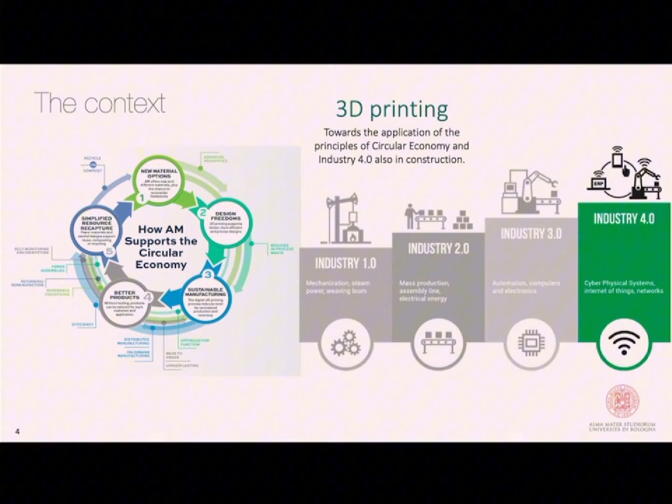But once it kicks in, you'll learn about how topology optimization and additive manufacturing can create a new generation of green steel construction, having more efficient structures, supporting circular economy, and providing more efficient structural forms.

Just to give you an overview of some applications of what I refer to as additive construction with a little bit of metal in it. When it comes to additive construction, most people just refer to unreinforced masonry units realized with concrete 3D printing. Honestly, to me it's not maybe the best way of using 3D printing to create something new that can be achieved only with 3D printing and not with conventional manufacturing technologies.

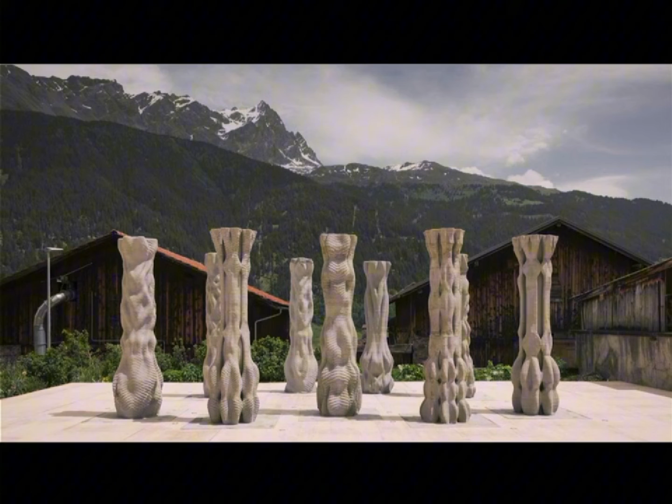So I would be more interested in something like that. This is actually what's called the dancing columns, a project from a couple of years ago from ETH Zurich. This is, to me, the sense of using 3D printing to create something new, not necessarily conventional, but out of the box - not just in form, but also in material.

This is an example of earth 3D printing done by an Italian company called WASP 3D, so that you can actually build with other materials.

And hey, you can also build with metal. This is actually the first example of large-scale metal 3D printing for construction, which I'm going to talk a little bit more about later.

Hi, Thomas from MX3D here.

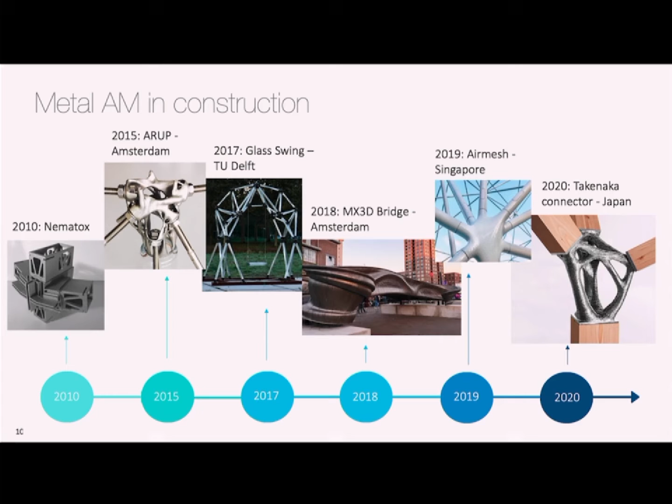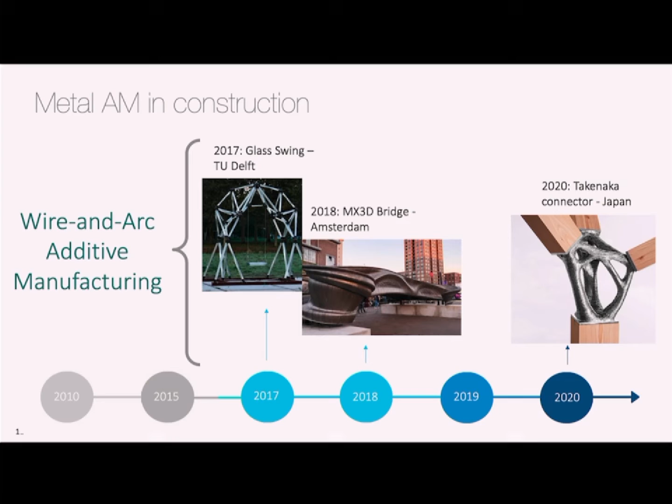Just to give you an outline of metal 3D printing in construction, the timeline is quite short. There were just a few applications almost 15 years ago, but mostly in academia, not really applied in real constructions. When it comes to the scale of elements to be printed, it increased only with the use of wire arc additive manufacturing - large-scale metal 3D printing solutions.

This is actually the very first example - it was a facade node in aluminum made by powder bed fusion, and it was just an academic application.

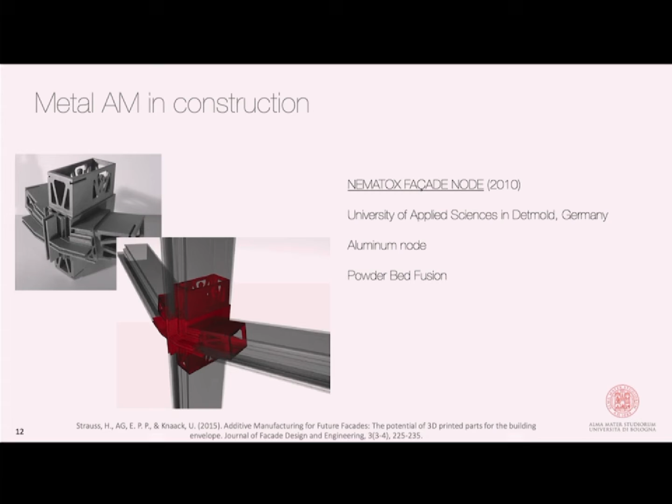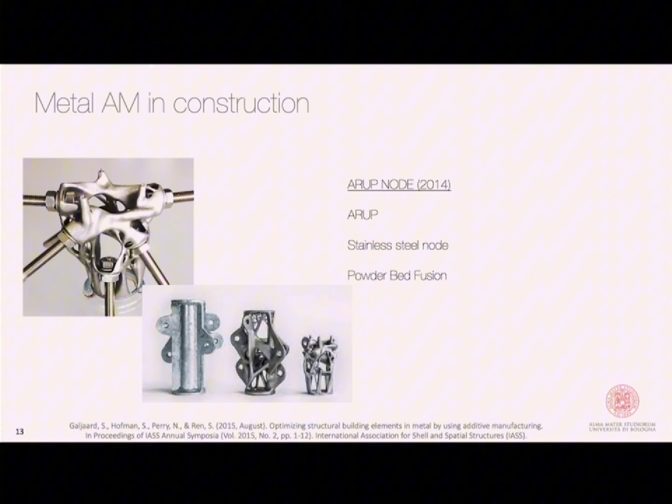The real first industrial application of metal 3D printing in construction comes with the Arup node. It was a project done by Arup, from their Amsterdam office. It was a pity that it never actually saw the light of a real application. But this one did - this was the very first application, to me, of what it means to create something in metal 3D printing for a construction application.

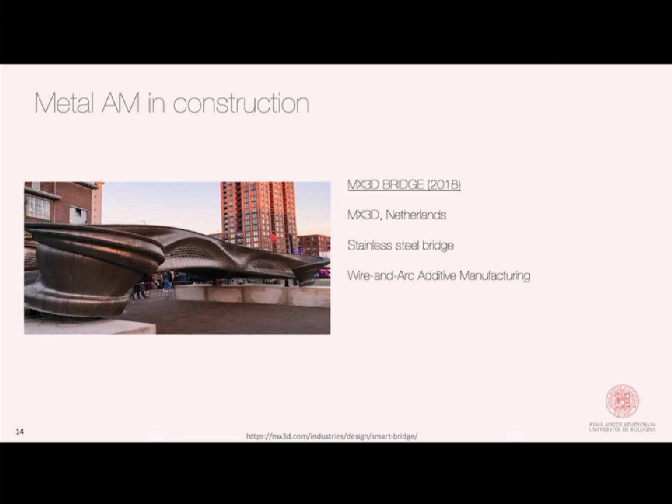This was a footbridge realized entirely with wire arc additive manufacturing, stainless steel, with some new forms.

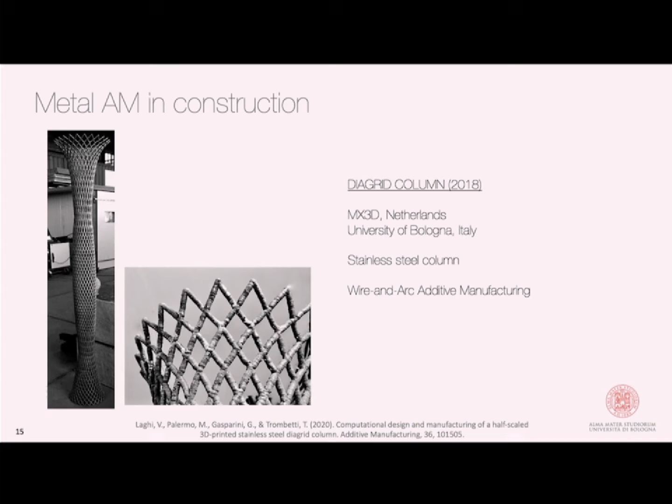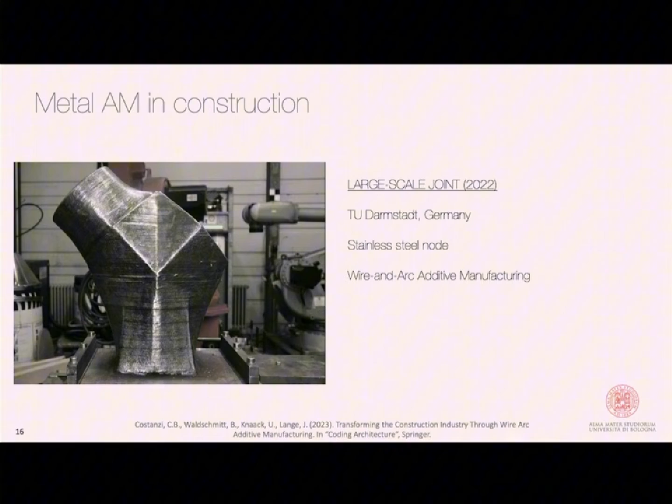During the same year, we also printed at the same facility with the same wire, but with a different deposition strategy - an entire column made in diagrid, which I'll talk about later. Just to increase the size of the connections, this was another example of how big you can actually print, and you can use this for complex shaped joints - as for this case, for an oil and gas application - or to create something completely new.

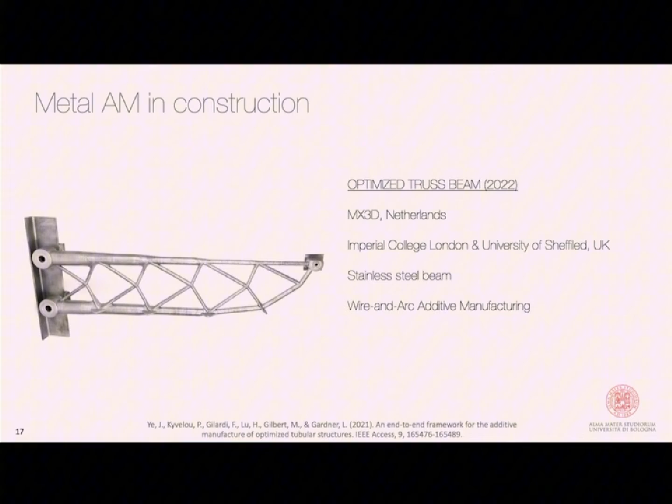So now we're moving towards topology optimization and metal 3D printing to create new construction elements and new structural forms that are efficient in this sense.

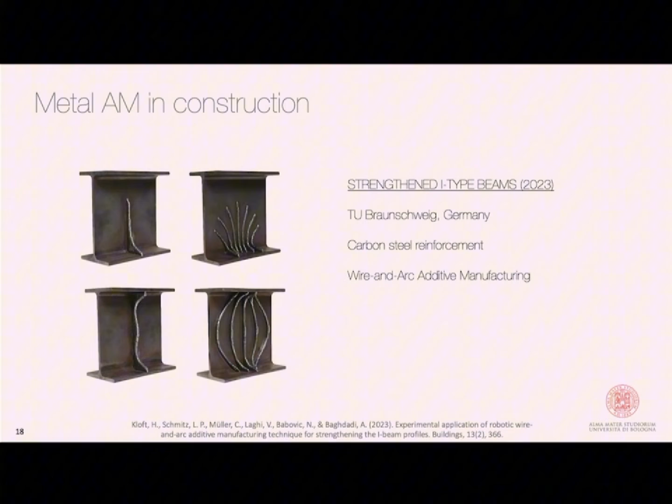Not just that - you can also do some sort of hybrid manufacturing, in the sense that you can use the WAAM to strengthen conventional pieces, not just create something from scratch.

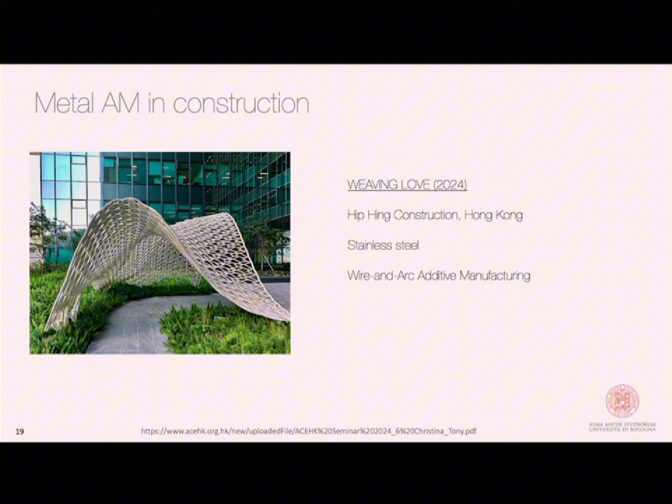This is something I actually saw by chance. I was in Hong Kong in November 2024, and I saw that in front of the government center, and it was entirely printed in WAAM. I could stand just below this very cool pavilion - I'm not that tall, but it's almost 2 meters of height, so that's tall enough for me.

But what is wire arc additive manufacturing? To give you an overview, it's honestly a welding deposition strategy mounted on top of a robotic arm - a sort of automatic welding deposition that creates something in metal 3D printing. Just a simple and practical definition of that.

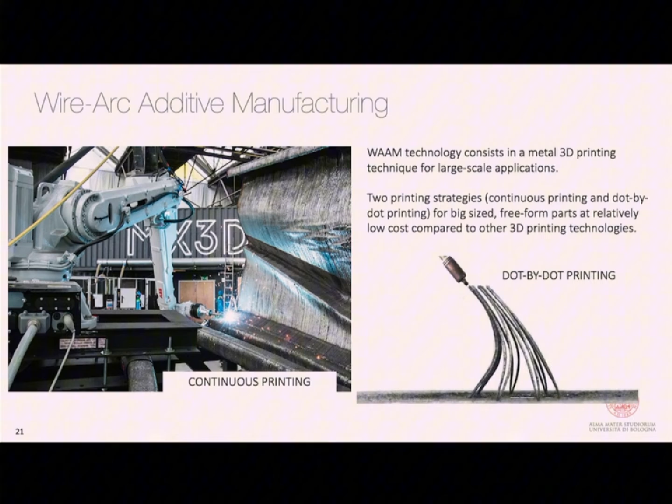There are two different deposition strategies that can be used: the so-called continuous printing, which is a sort of FDM, layer by layer, but also dot by dot printing, to create lattice forms and structures - something new.

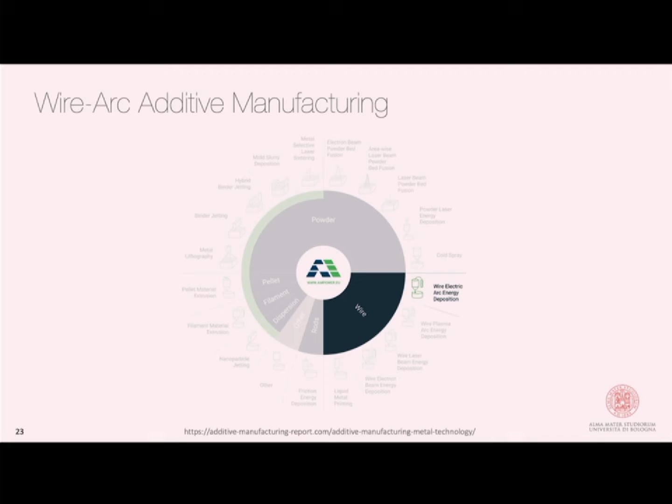Just to give you an idea of how many metal additive manufacturing processes exist out there, this is a report from AM Power. Wire arc additive manufacturing is also called wire DED, arc DED, like many other names, but it's just a tiny piece of that.

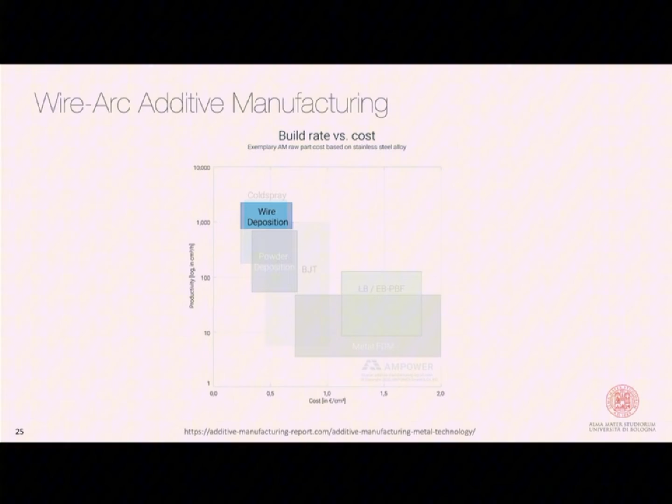But what's interesting, especially for the construction sector, is this matrix to me - build rate versus cost. Actually, wire arc additive manufacturing is the best one for construction because we don't have that much money and we need to build big.

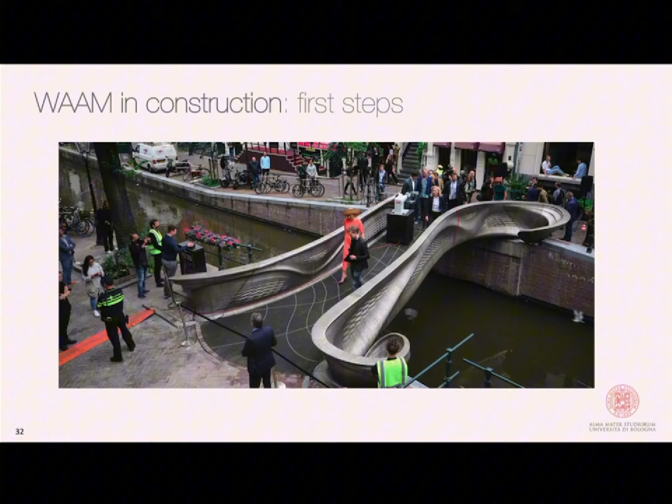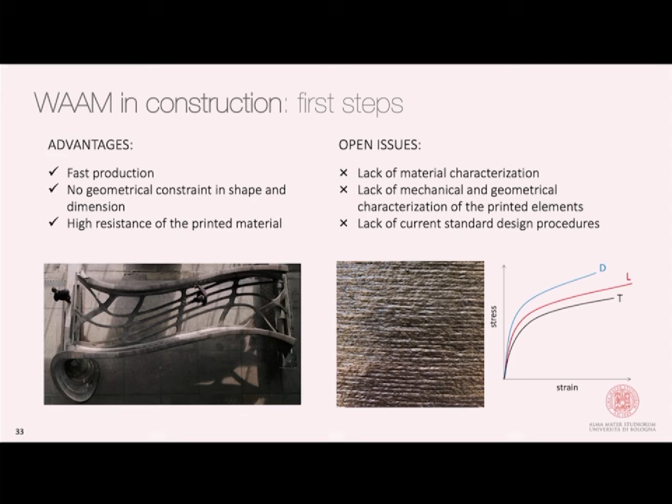So the advantages are, of course, that you can actually build with free form. There are no geometrical constraints, either in shape or in size. But of course there are still limitations. There are no current regulations, certifications, or guidelines for structural design, and there's still a bit of a lack of characterization of the material and the pieces to be printed.

But we're getting there. There's an increasing interest in this technology, especially compared to others. DED, or WAAM, or large-scale metal 3D printing is increasing in interest. There are also current regulations out there for specific sectors, for example oil and gas, and now also construction. We're getting there slowly.

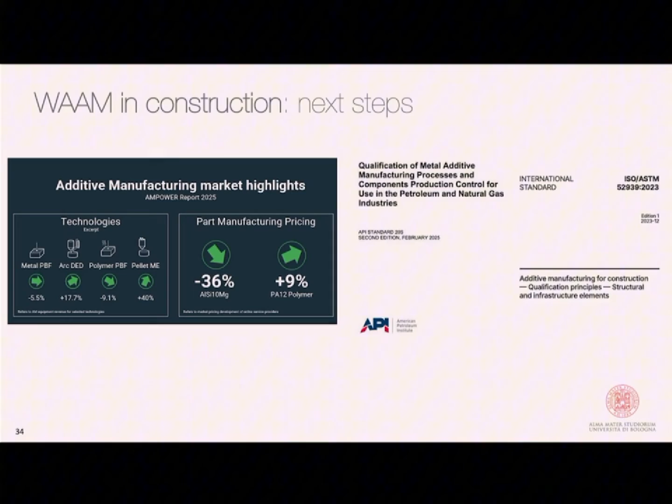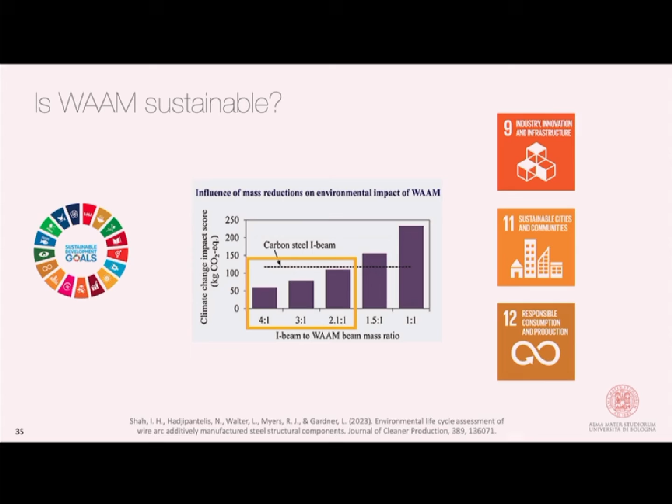Another question I'm asked very often is: is this technology sustainable? To me, sustainable is a broad concept. When it comes to environmental sustainability, it is sustainable as long as you're using it efficiently, not just to achieve the same exact geometries you could achieve with conventional manufacturing. If you're creating something resource efficient and optimized for its use, then it is sustainable, and there is proof of that.

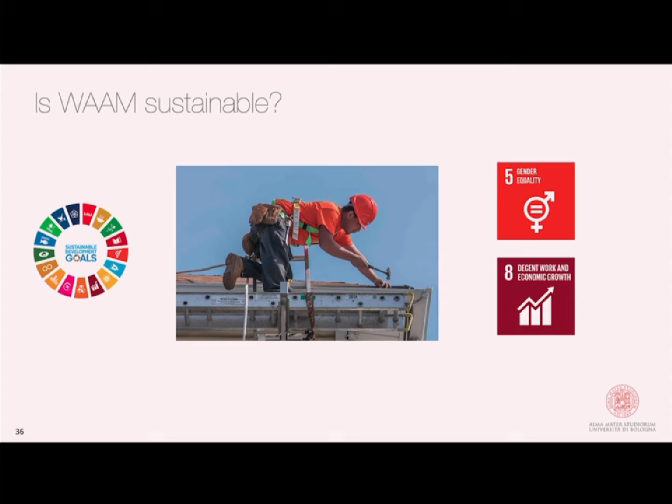I'm also going to show that later. But sustainability for me is also from a societal perspective. There is proof that by increasing digitalization in a sector such as construction, you can also improve gender balance and achieve a more sustainable society, to be fair. Our aim and goal is to print something new and create new forms for a new generation of steel constructions.

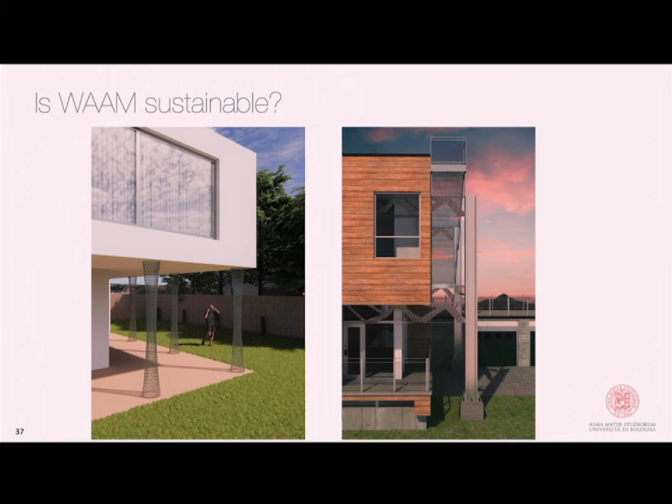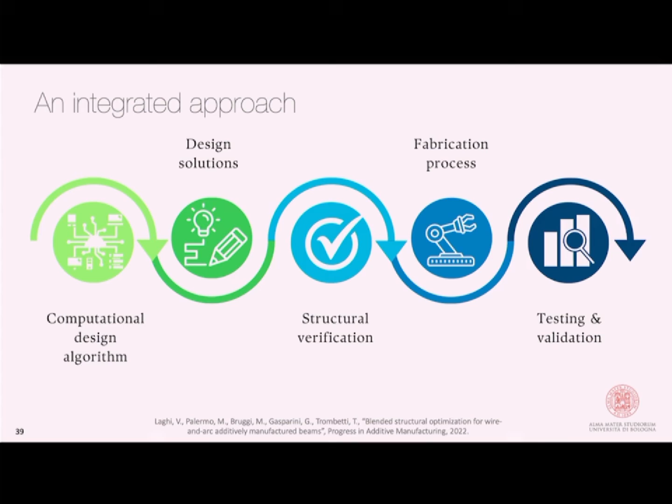These are just a few examples of that - case studies and ideas developed mainly at the University of Bologna on how to integrate optimization with large-scale metal 3D printing for construction. The idea is this sort of integrated approach, which I've renamed blended optimization, because we're not going purely into analytical topology optimization. We want to blend together many different aspects and inputs from structural requirements, manufacturing constraints, and honestly personal judgment from applications in structural engineering.

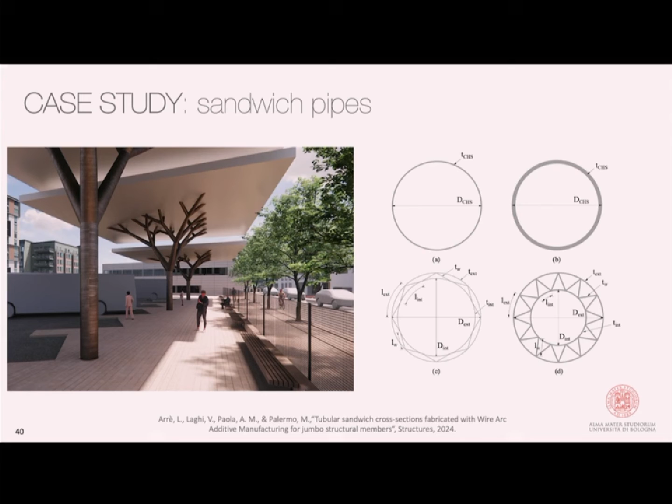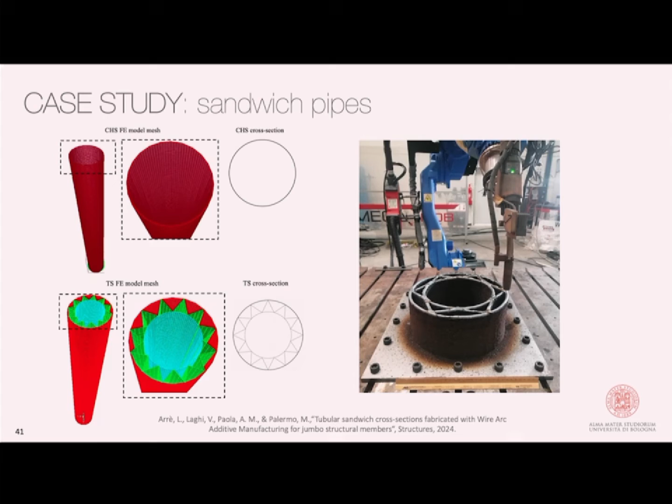The first example is a sandwich pipe, let's call it a sandwich tube, tubular sandwich cross sections - there are different names for that. Think about a jumbo structural cross section for which you need very thick elements, very thick pipes. The idea is that you need that thickness to overcome local buckling or lateral pressure. So the idea is to recreate the cross section by creating this sort of sandwich cross section. We tested that, validated it numerically, and also printed it. So yes, it is solid and valid.

The other idea is to combine not just optimization in the sense of form, but also try to engineer the material. This is actually a broader research area, so I'm happy to dig more into that later if you're interested. The idea is that we discovered this sort of orthotropic behavior of the stainless steel material once it's printed. So we engineer and use the different layer orientations to create something stiffer thanks to this orientation and orthotropic behavior, achieving different structural solutions and optimizing the beams for each different orientation. Then we think about which one actually works best based on the orientation of the material.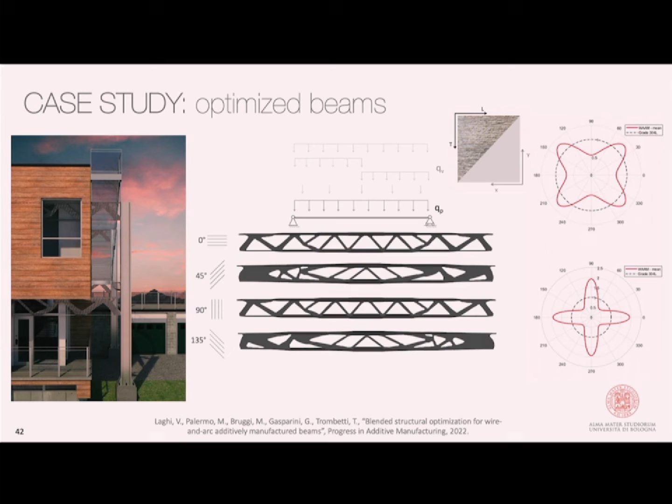Not just that - we also applied different load conditions and different support conditions to recreate some real life conditions, because in reality you don't really know what type of load a beam is going to be subjected to. So again, we verified that, we tested it, and everything works, so that's great.

Next one is the optimized joint. I'm really excited about this because the grid shell from British Museum has always been one of my favorite structures, but I also got into knowing this not very well-known research in which the engineer behind the conventional joints used for the grid shell was claiming that it was very hard to actually create these joints.

They had to produce 1,566 different joints in CNC from solid plates. Imagine the amount of scrap that was created just to make these single joints, and imagine how it could have been less material intensive if we could have printed these joints.

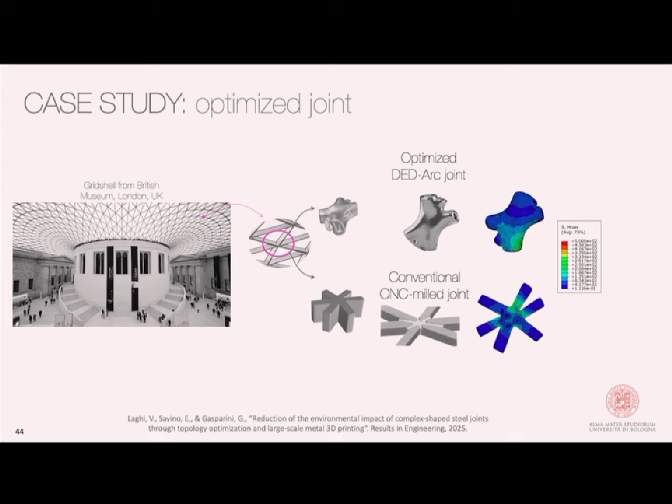So we actually created an optimized version that can be printed in WAAM, and we tested it against lateral buckling and everything. Honestly, we aimed at reducing the material up to 80% without even accounting for the scrap coming from the CNC. And then we also tried to do an environmental analysis on that.

We said, okay, just comparing apple with apple, comparing the manufacturing processes without digging into the optimization and how optimized the solution can be for WAAM, what would be the carbon footprint just related to the process itself. CNC is actually more impactful with respect to metal 3D printing, just because of the scrap.

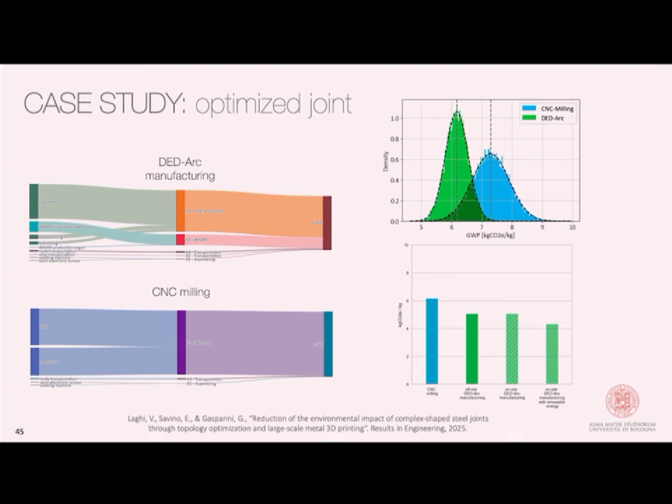Honestly, it was just a matter of material utilization. CNC can achieve a utilization of like 50%, whereas metal 3D printing can achieve 95% utilization. And not just that, if you're combining that with topology optimization, imagine how you can reach more sustainable goals.

So not just in terms of environmental impact, but also from the economic point of view, because metal right now is kind of costly, so it makes sense to actually reduce the amount of that.

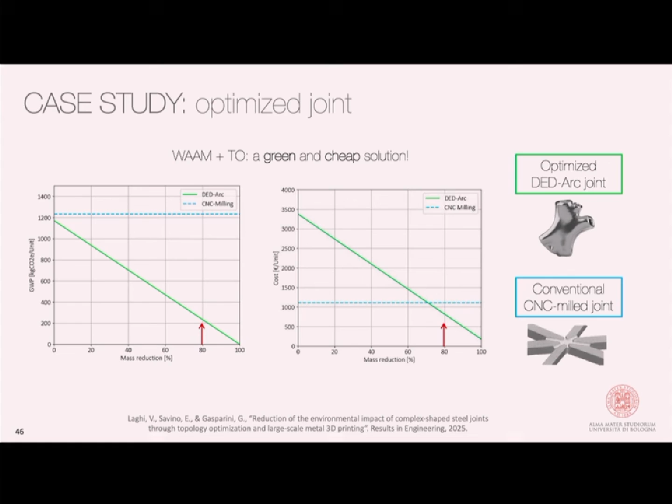Last but not least, this is another cool application. So we wanted to create something. I've seen so many cool presentations about lattice material yesterday and today. So we wanted to use the concept of lattice material, but in a structural form.

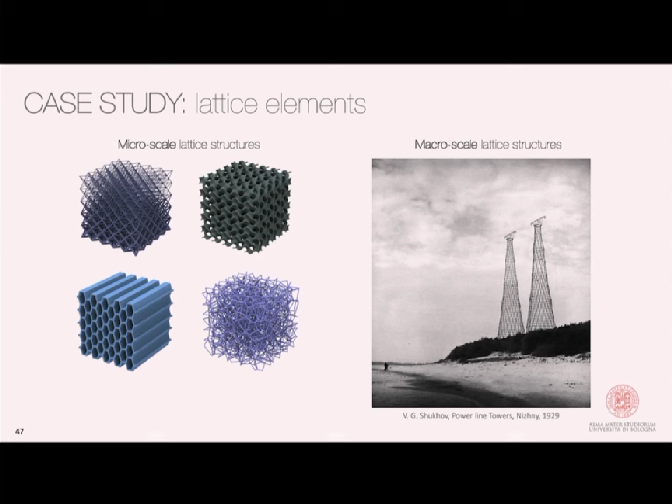From a structural perspective, lattice materials are actually like grid shells and truss structures, something that we are kind of familiar with. But we wanted to create a version at the mesoscale, the scale of the single element. So we created something like lattice elements, lattice structures.

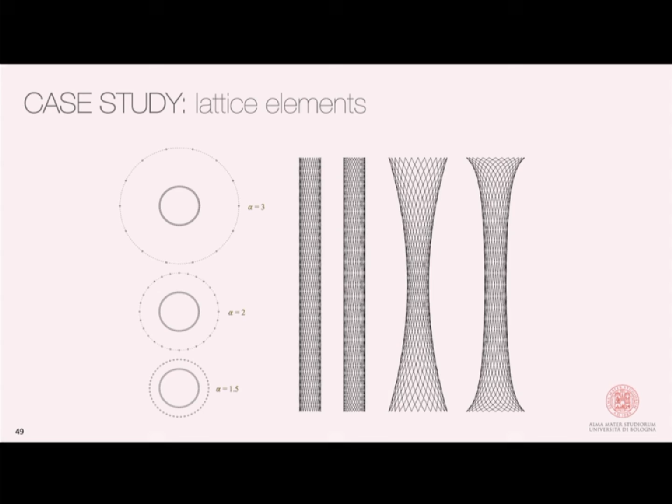We patented this, so the design concept is to create an atomized version of the cross-section based on the solid pipe cross-section, in which it can achieve the same performances as for slender elements with a reduction of material use up to 75%.

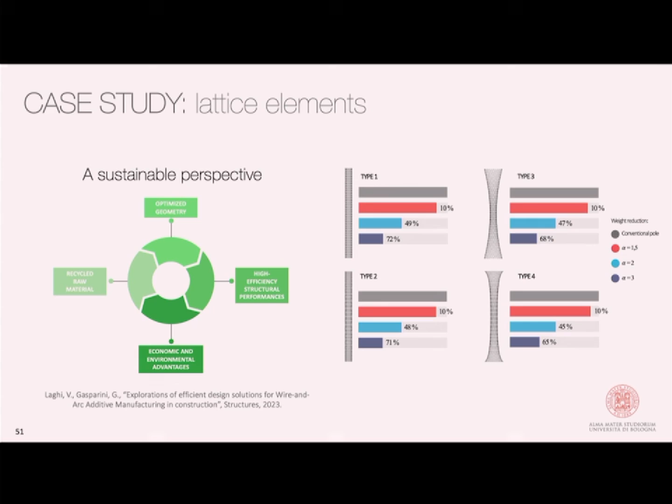So that's great. And imagine if we go back to the previous concept of how we can achieve a greener solution - if you're reducing the material use, then it's going to be greener and more sustainable for sure. Not just that, we got into these lattice ideas.

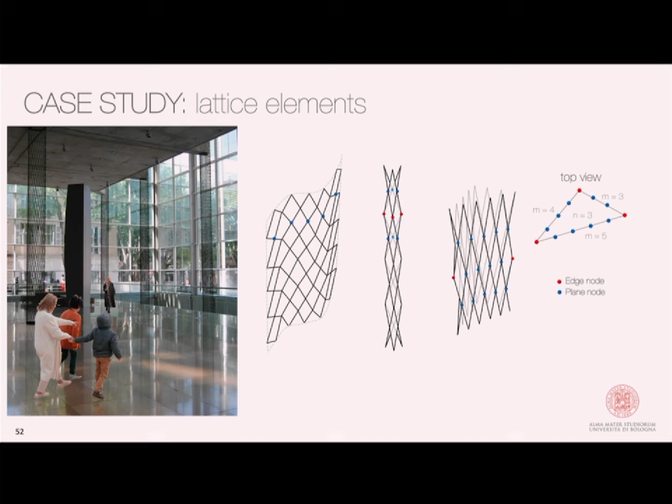And so we had fun creating some cool shapes and forms. We printed the first concept in 2018, and then we started developing other cool concepts and ideas.

And we also developed a plugin for Grasshopper, which is called Lattic3. So feel free to download it if you're interested.

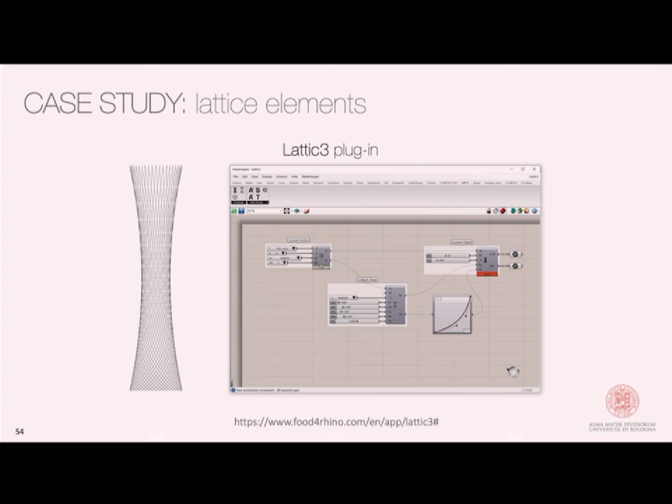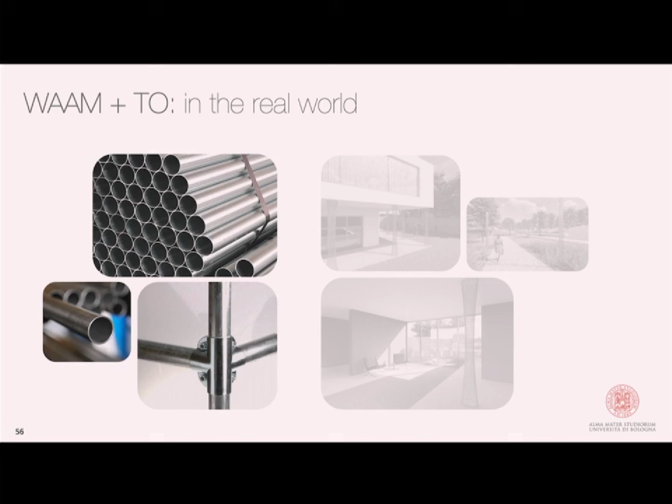So what's next? In the real world, how hard is it to go from structural conventional pieces to freeform optimized 3D printed pieces? What do we need to close this gap?

So we took a survey, the same identical survey among current generation and next generation of engineers - students from civil engineering courses and architectural courses, and professionals. And we asked the same exact questions, like how familiar are you with metal 3D printing in construction and in general, the metal 3D printing processes.

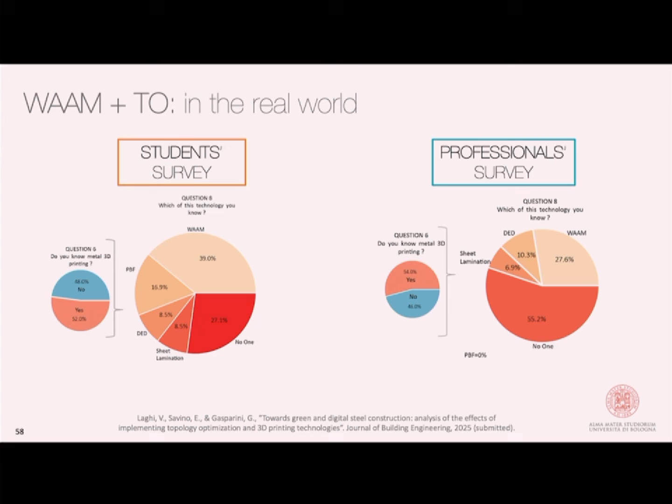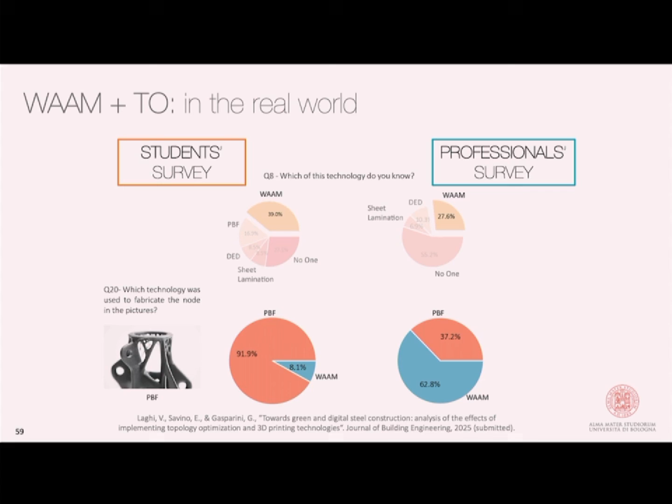And the same goes for topology optimization. We also asked similar questions about topology optimization and how to recognize if a piece was actually optimized or not. And the responses were actually very vague.

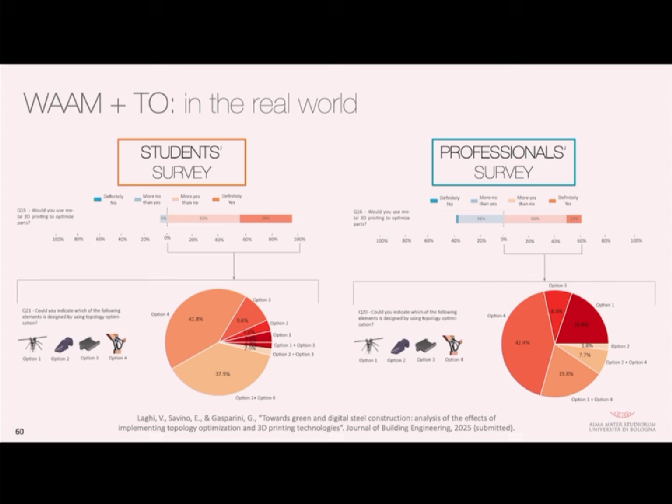So meaning that, honestly, there is an interest from current and future generations of engineers to apply these new technologies and optimization ideas and additive manufacturing for construction. But they need to be properly trained because they honestly don't know it yet.

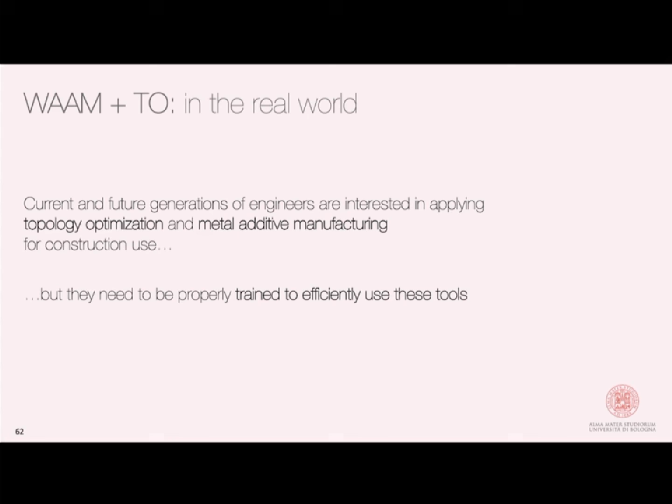So this is also where our spin-off company goes. We're trying to bridge this gap between academia and industry by applying large-scale metal 3D printing, not just in construction, but also in architecture, design, and other industries, and to train them.

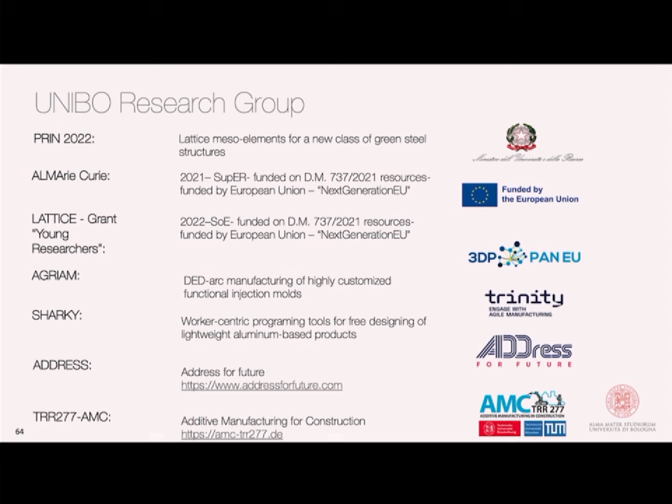So these are just some of the projects that helped us realize the cool things that I showed. And thank you - hope to answer your questions.